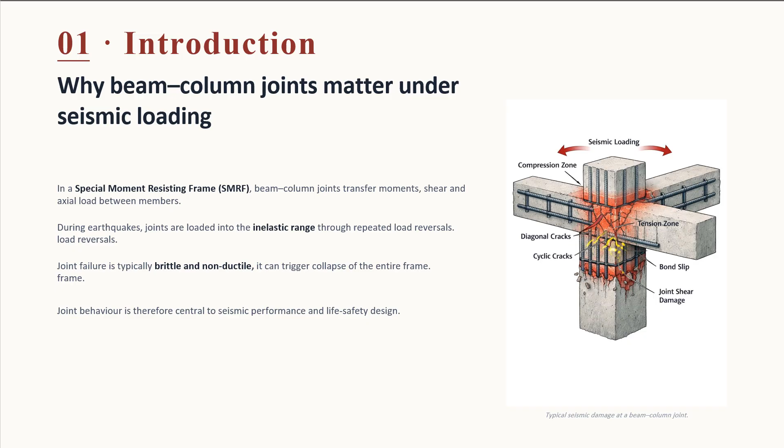Why beam column joints matter under seismic loading: in a special moment resisting frame, beam column joints transfer moments, shear, and axial load between members. During earthquakes, joints are loaded into the inelastic range through repeated load reversals. That's why joint failure is typically brittle and not ductile, and it can trigger collapse of the entire frame. Joint behavior is therefore central to seismic performance and life safety design.

What was our research about and what was its objective? The research is about inverted L-shaped joints that are uniquely vulnerable. They sit at the roof exterior location where the slab and one beam are absent. The result is geometric discontinuity at the joint core, asymmetric and reverse moment transfer, limited anchorage length for beam bars, and higher risk of brittle joint shear failure.

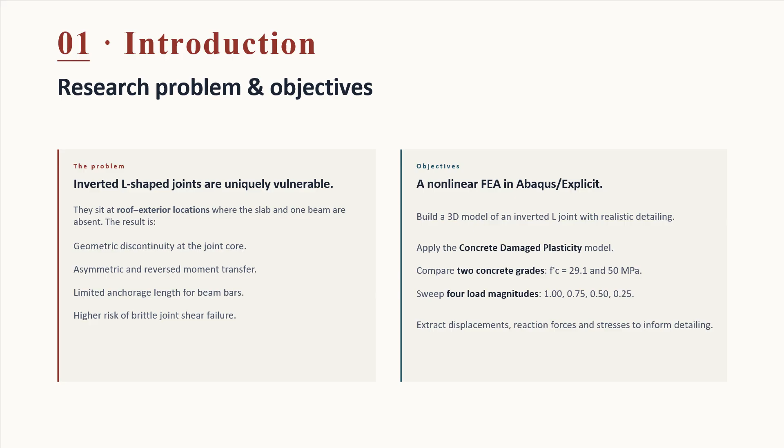The objectives of the research were to build a nonlinear finite element model through Abaqus for the inverted L joint with realistic detailing, apply the concrete damaged plasticity model, compare two concrete grades, F'C 29.1 and F'C 50 megapascal, sweep four load magnitudes 1, 0.75, 0.5, and 0.25, and extract displacements, reaction forces, and stresses to inform detailing.

Through the literature review, there were many documents talking about special moment resisting frames. If we want to specify what a special moment resisting frame is, we can say that for each beam and column connection, there is a certain resistance for the lateral load, primarily through flexural action, with detailing chosen to deliver large inelastic deformation capacity.

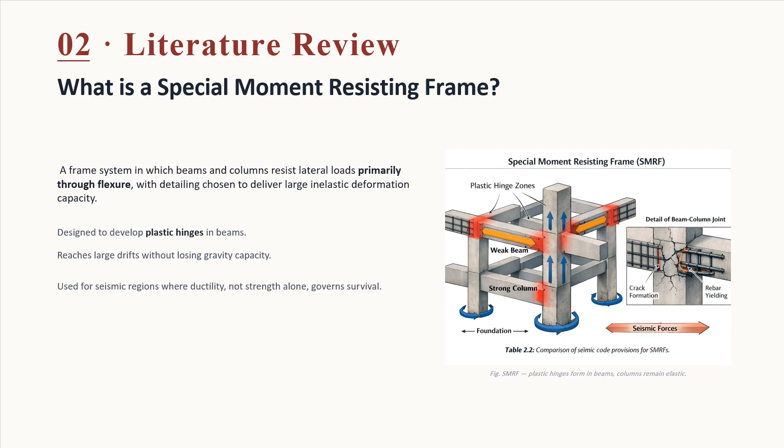This special moment resisting frame is designed to develop a plastic hinge in the beam, reach large drift without losing gravity capacity, and is used for seismic regions where ductility, not strength alone, governs survival.

The strong column and weak beam philosophy is the main issue of the plastic hinge. Plastic hinges must form in beams and not in columns. Why? We have to avoid soft story collapse. If columns yield first, an entire story can collapse vertically with brittle failure and no warning.

How are we going to make the plastic hinge form inside the beam and not the column? According to ACI code, it enforces the column-beam flexural strength ratio such that 1.2 times the summation of the beam moments should be less than or equal to the summation of the moments in the column, so the beam will yield first at every joint.

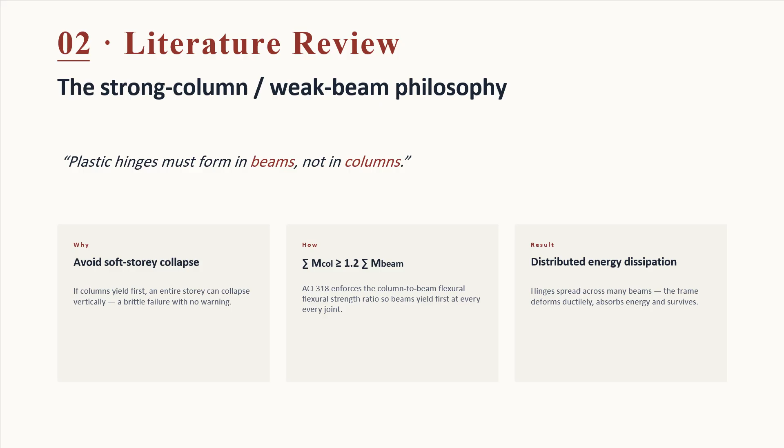The result will be distributed energy dissipation, with hinges spread across many beams, and the frame deforms ductily, absorbs energy, and survives.

Classification of beam column joints can be interior, exterior, or corner. The interior has 4 frame members, which gives the best confinement. The exterior has 3 members, with 1 bar that must be anchored, and the corner has 2 members in plan with very limited confinement.

If we are talking about the roof, which is the case of our study, we have the top story where the column stops. Now we are talking about interior, exterior, and corner joints without continuation of the upper column.

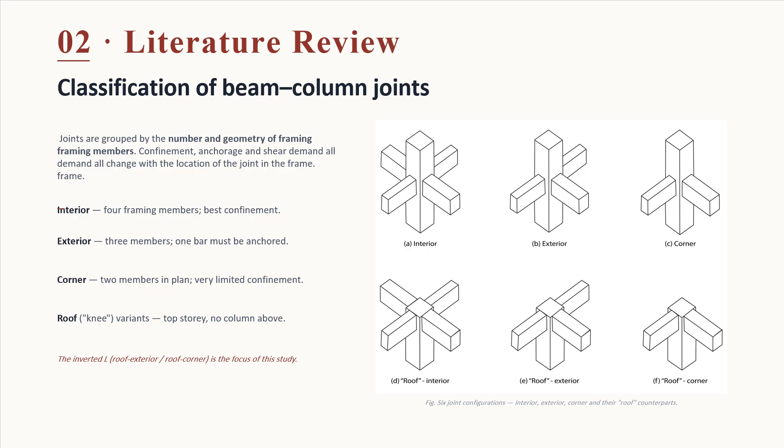How can a beam column joint fail? Usually this failure happens as joint shear failure, such as diagonal cracking through the joint core, which is brittle and most dangerous, or bond or anchorage slippage where the beam bars pull out when development length is insufficient, or beam hinging, which is the desired ductile mechanism with flexural yielding at the beam, versus column hinging.

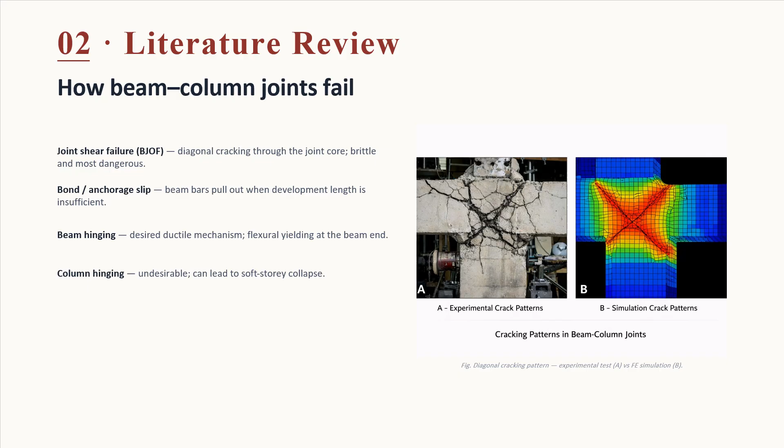Column hinging is undesirable and can lead to soft story collapse.

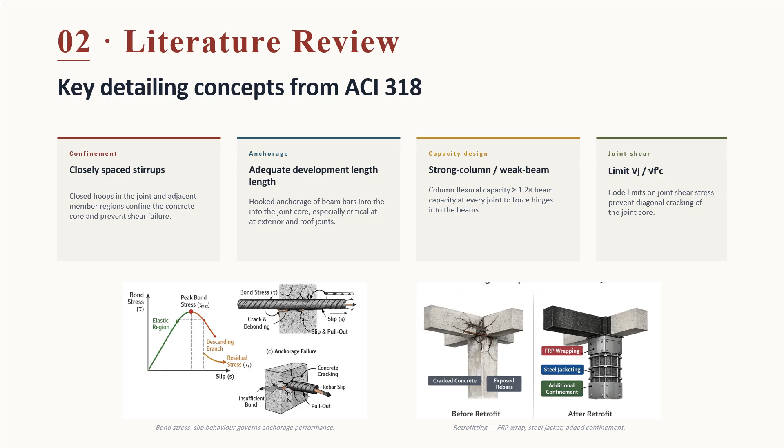Key detailing concepts from the ACI code ensure the following: confinement, with closed and closely spaced stirrups at the connection; anchorage, with adequate development length; capacity design, through strong column and weak beam as mentioned previously; and joint shear, where the code limits joint shear stress to prevent diagonal cracking of the joint core.

Why is the inverted L joint critical? It is the least confined, least redundant joint in a moment frame, yet it is exactly where the exterior columns meet the top story beam. There is no column above to confine the joint core from above.

Only one beam frames into it, so force transfer is asymmetric, and the anchorage of the beam bars is limited by the column depth alone.

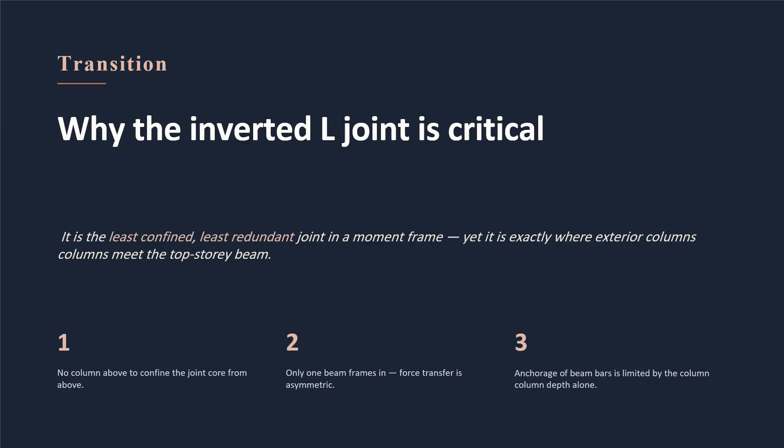Through the research, we followed this methodology: we assigned the geometry, the reinforcement, and the material, built the finite element model, assigned the boundary conditions and the loading, then ran the model and found the outputs we are going to discuss, which are the displacement, reaction forces, and principal stresses.

For the geometry, we chose a beam of 1.5 meters and a column of 3 meters. The section for both the beams and the columns was chosen to be 300 by 300 millimeters. The joint was an inverted L section with roof exterior, and the model was done through Abaqus.

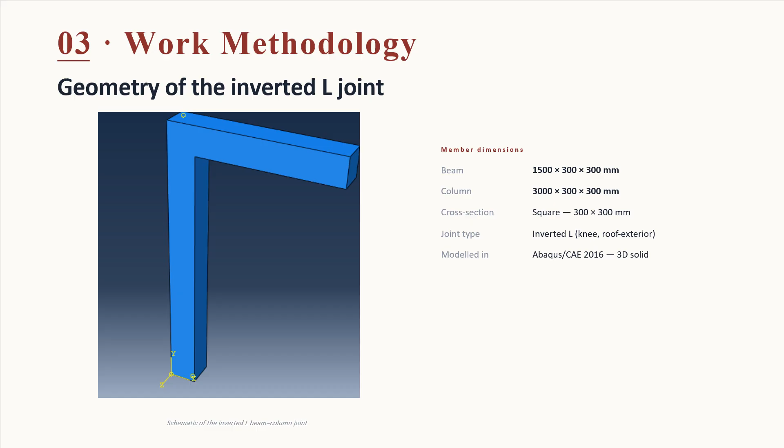For the reinforcement details, the column modeled was 8 phi 16 longitudinal bars, and stirrups were phi 10 spaced at 75 millimeters. For the beam, the top reinforcement were 2 bars phi 16, and the bottom were 2 bars phi 16. The stirrups were phi 8 spaced at 75 millimeters near the joint and 150 millimeters away from the joint.

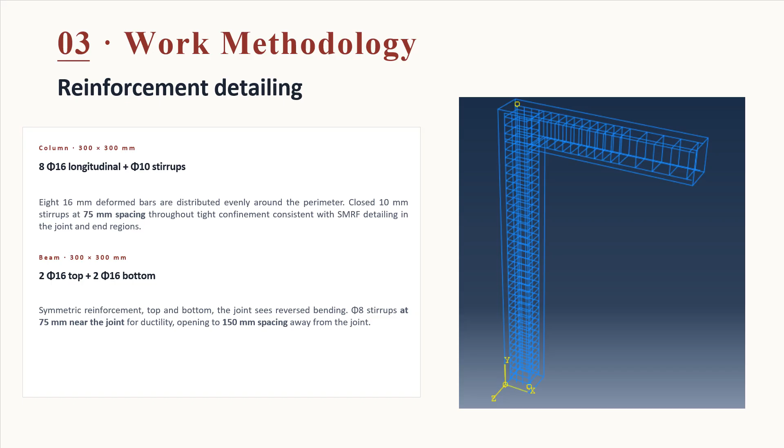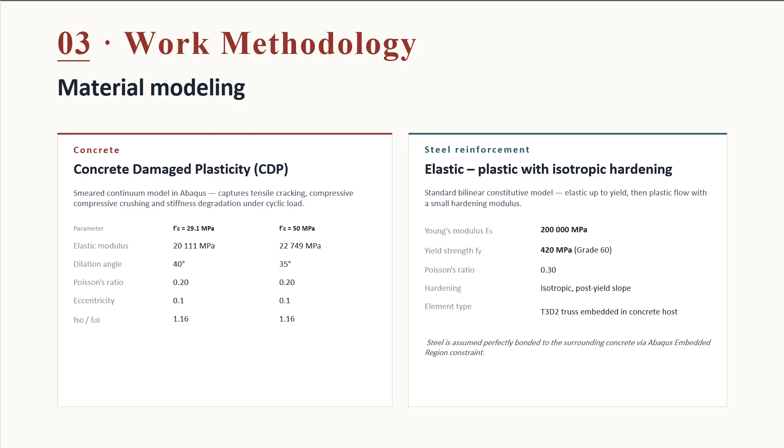For the modeling of concrete and steel, the concrete damaged plasticity model was used for F'C 29.1 and F'C 50 megapascal. For the steel, the elastic plastic model with isotropic hardening was used with F yield 420 megapascal.

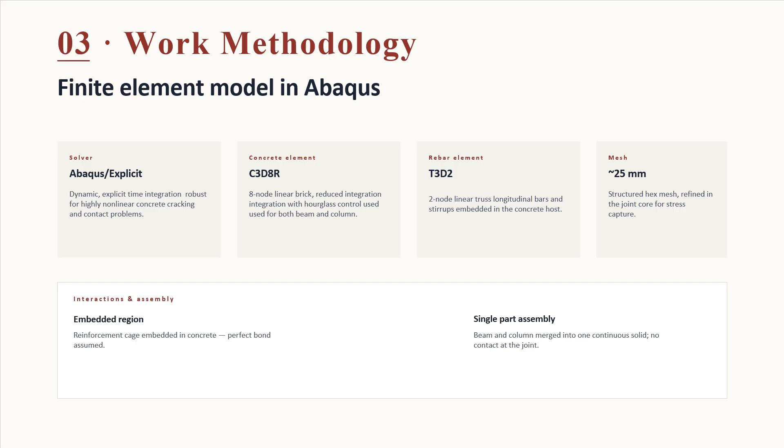We started the model through Abaqus explicit, modeled the concrete material that we need, added the rebars, and then ran the software to get our results.

We added also the boundary conditions where the column was fully fixed at the base, and we added at the beam tip a roller restraint preventing horizontal displacement only. The load pressure was varied from 0.25 to 1, which was assigning the lateral load.

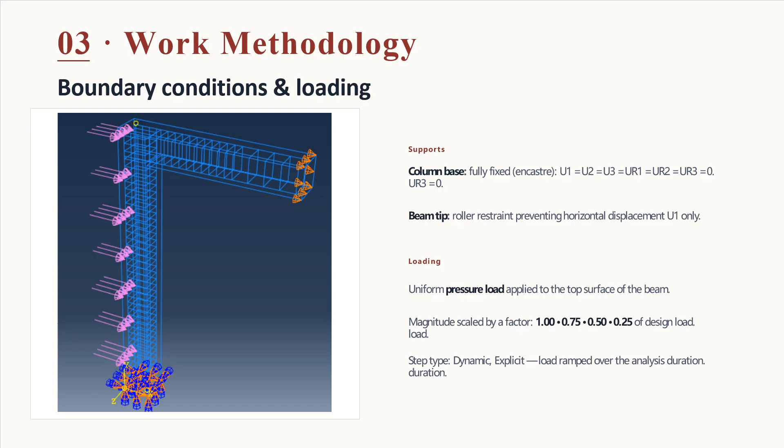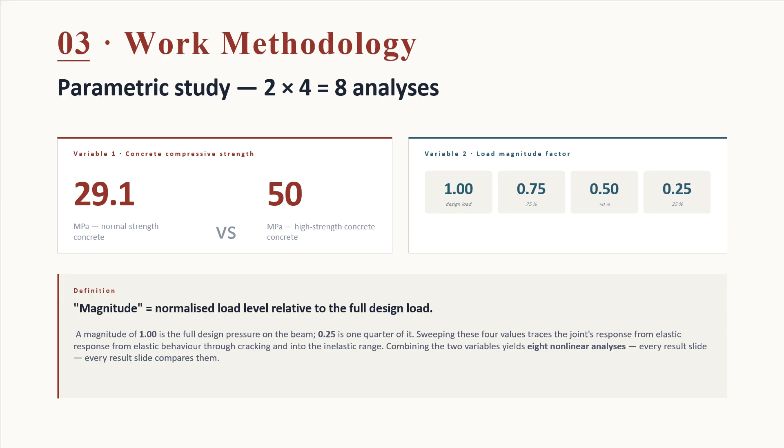For F'C used, the comparison was based between 29.1 and 50 MPa, and for the various types of loading varying from 0.25 to 1. The results that we are going to discuss are the displacement, the reaction forces, and the stresses.

As for the displacement, we noticed that the models related to higher F'C showed a lower displacement, which is 40.32 millimeters, compared to that of the lower F'C, which was 45.39 millimeters. Higher F'C showed a stiffer joint and a smaller drift, an 11% reduction in the lateral drift by the stiffening of the concrete.

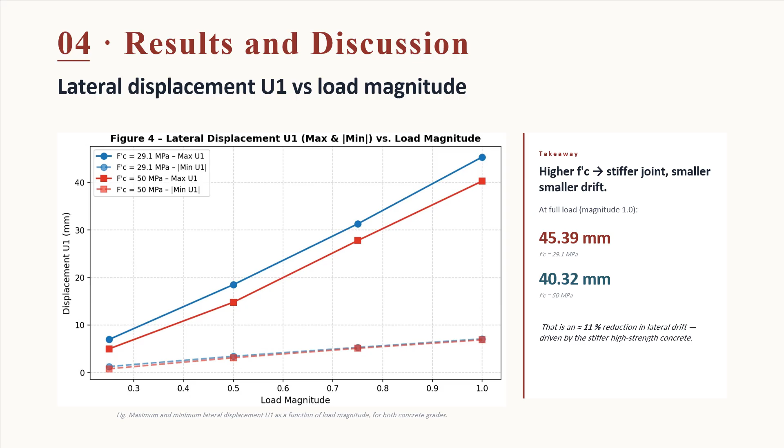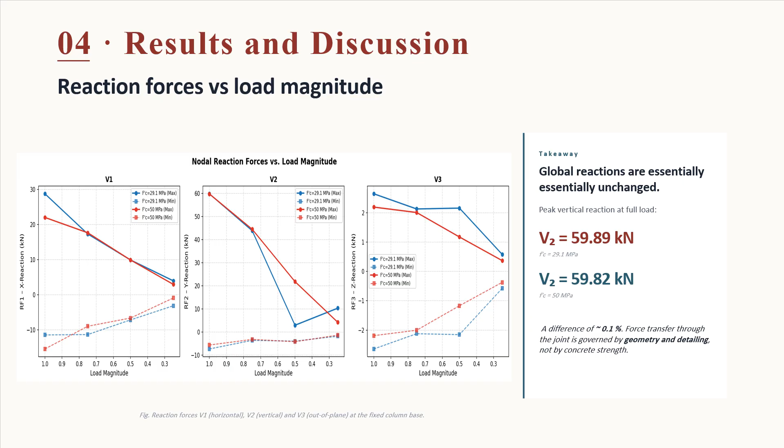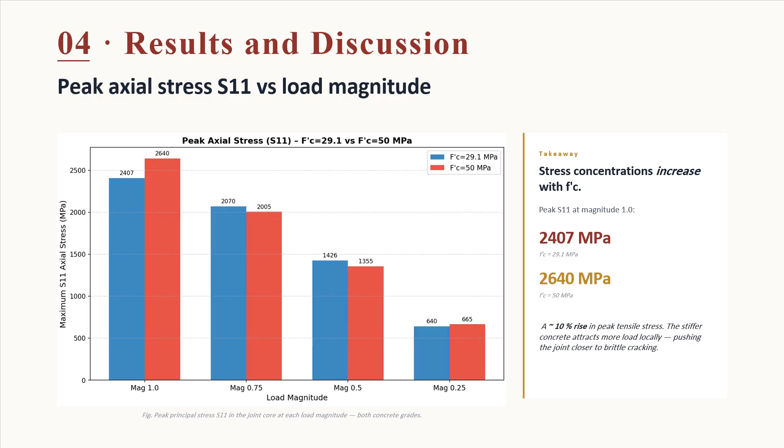In summary, the displacement showed a lower value as mentioned previously for the higher F'C, compared to the stresses that showed higher stress for the higher F'C. So displacement dropped for the higher F'C, the shear reactions stayed nearly the same, and the stress distribution rises with the higher F'C for the concrete.

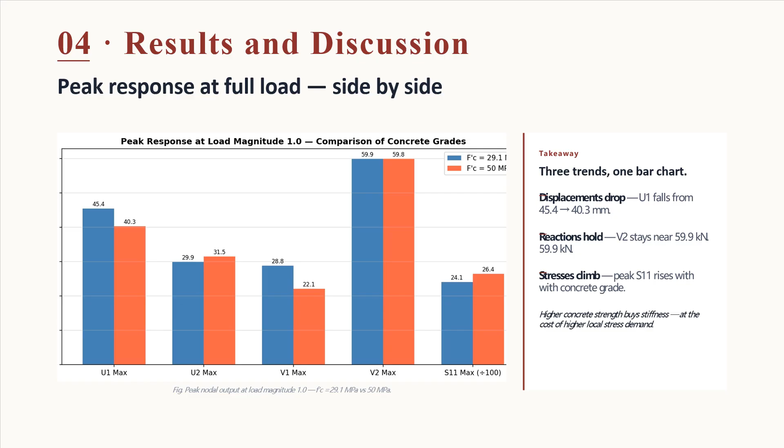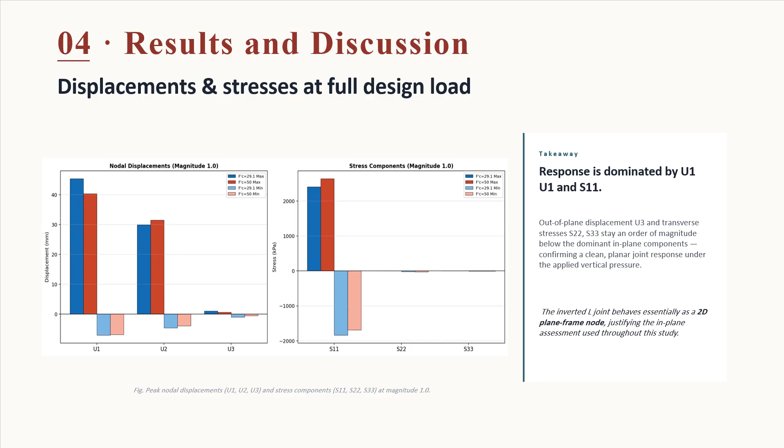As a summary of the displacement and stresses, the out-of-plane displacement U3 and transverse stresses S22 and S33 stay an order of magnitude below the dominant in-plane component, confirming a clean planar joint response under the applied vertical pressure. The inverted L joint behaves essentially as a 2D plane frame node, justifying the in-plane assessment used throughout this study.

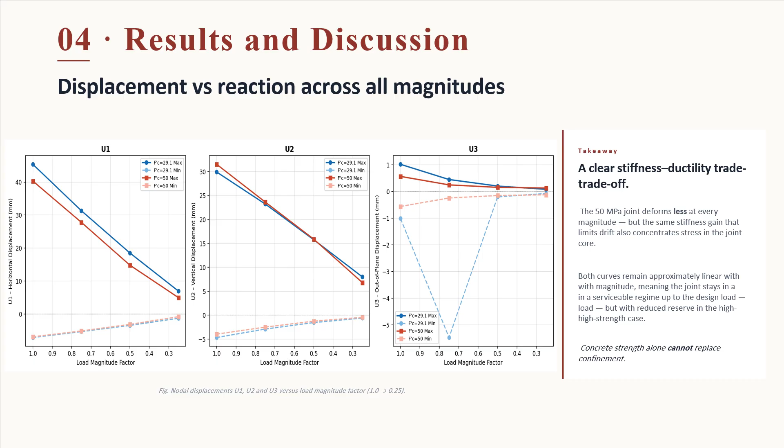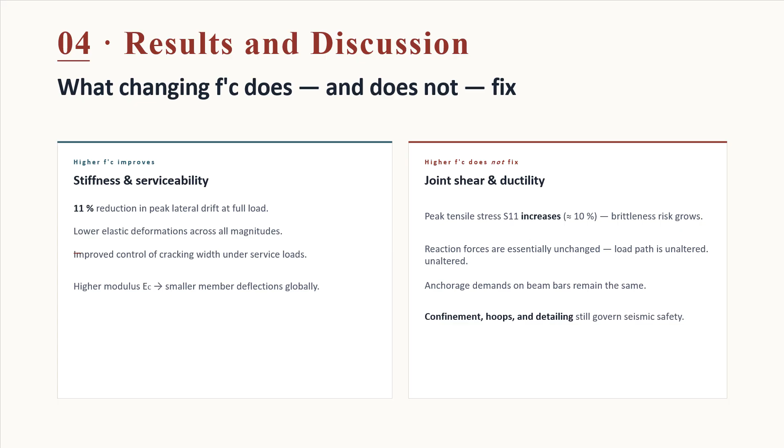What higher F'C does not fix is the peak tensile stress S11, which increased by 10%, causing a more brittle failure than the lower F'C. Reaction forces are essentially unchanged and the load path is unaltered. Anchorage demands on beam bars remain the same, and confinement hoops and detailing still govern the seismic safety.

In conclusion, the nonlinear finite element analysis through Abaqus captures the response of the inverted L joint. Higher strength concrete reduces the drift but raises the stress concentration. Global force transfer is governed by geometry and detailing, not by F'C, and confinement hoops and anchorage remain the primary tools for seismic safety.